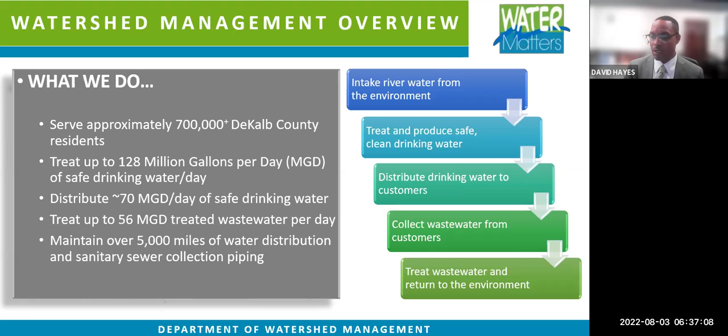Next slide, please. So why is the county replacing the water line? Some of the water lines are more than 60 years of age and have by far outlived their design service life. By replacing these lines, we will be reducing water main breaks and improving service, which will yield a better DeKalb for our future. And to accomplish this, next slide, please.

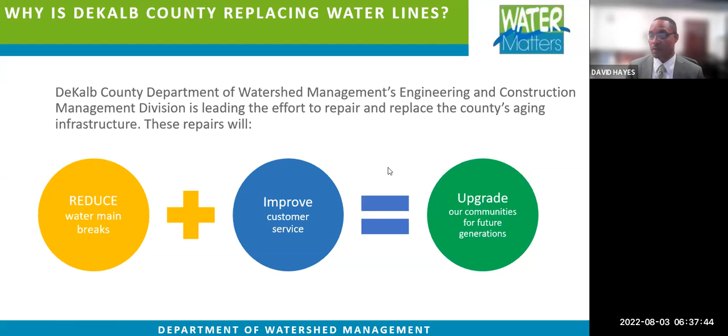To accomplish this, we have dedicated a full team for this project to include every needed resource from Watershed and all other DeKalb County departments, as well as several industry-leading engineering firms and construction firms who will be led by Watershed's engineering department. This will allow a timely, safe, and successful project.

Managing this initiative, and the next person you will hear from is our program manager, Ms. Cassandra Marshall. Thank you, Director Hayes. Good evening. My name is Cassandra Marshall. I'm the Program Administrator for Watershed Management. I am responsible for managing the construction projects and the DWM construction management staff.

In these next few slides, I will provide an overview of the system problems and our solution to repairing the aging water system. Next slide.

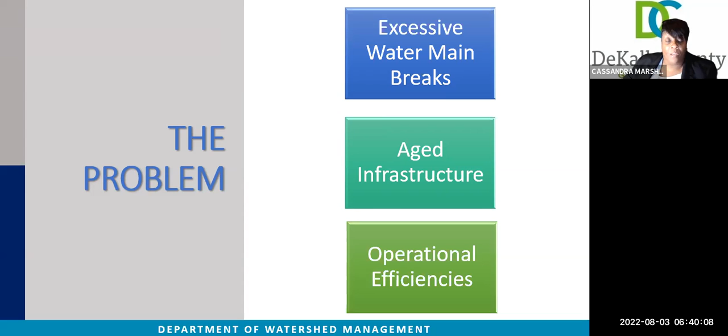To develop the model, we use the county GIS data, meter data of water usage from the billing system, and system facility data such as water storage facilities and regulating stations. This data was ultimately used to develop the county master plan and used to prioritize projects. Next slide.

So to this point of the presentation, you've heard about the problem and the development of a replacement plan. I will now speak about the solution and the execution of the CIP project. So what does CIP stand for?

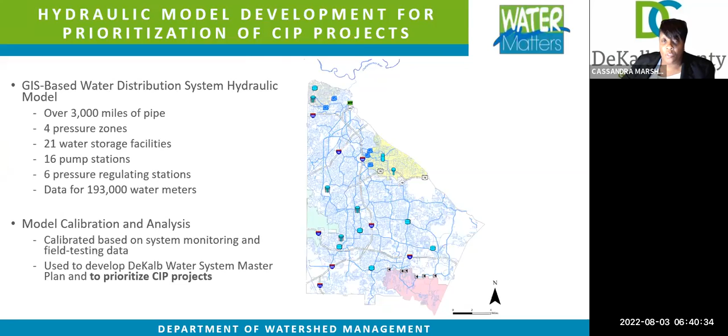CIP, or a capital improvement project, is a project that helps maintain or improve an asset. It can either be new construction, an expansion, renovation, or replacement of an existing infrastructure. Last year, the Board of Commissioners approved a new CIP program for $2.4 billion for projects to be completed from 2021 to 2030. The McClave water main project is a $6.1 million project included within that plan.

My team, the CIP team, is responsible for getting that work done. My team includes 4 DWM construction managers and 12 licensed inspectors. Later in the presentation, you will also hear from the DWM construction manager for this project, Mr. Edgardo Amezquita, who has over 20 plus years of construction experience and is a licensed water professional.

Along with in-house staff, we are also supported by consulting firms who help assist the county with construction management and inspection services. What we want you to know is we're here to help. We want to reduce or eliminate emergency repairs. We want to stop the breaks. We want to protect the environment. And finally, after this project is complete, it will improve sustainability to the system. These improvements should last a minimum of 70 plus years.

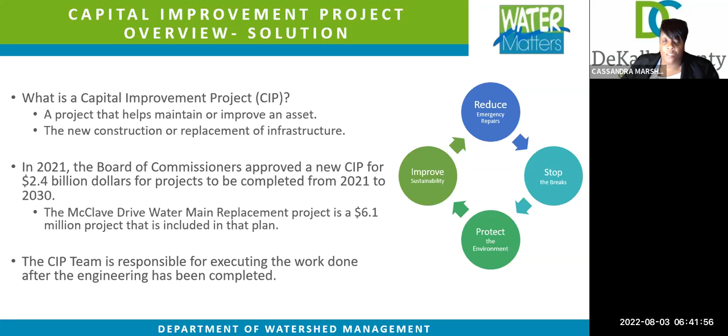You will now hear from Mr. Edgardo Amezquita about the project scope and overview. Good evening, everyone. My name is Edgardo Amezquita. I am the construction project manager assigned to this project.

And what my team does is we work closely with the contractor in order to facilitate and quickly and efficiently get this project done.

Our scope of work includes mobilization of equipment and materials. Some of the equipment you will see will be backhoes, dump trucks, metal plates on the street. Some of the materials you'll see delivered throughout the project include concrete, gravel, and towards the end of the project, asphalt being delivered and installed.

We also established traffic control. The traffic control will be with sign postings, and you'll also see traffic directing personnel. Please adhere to that direction while they're out there, because they're out there for your safety as well as the construction workers'.

We also install the new water main, and then we establish new water services. The water services come in two phases. The first phase comes early on in the project, where we install the actual copper piping used for the service. Phase two is when we actually connect that copper pipe to the households, which doesn't happen until the end of the project.

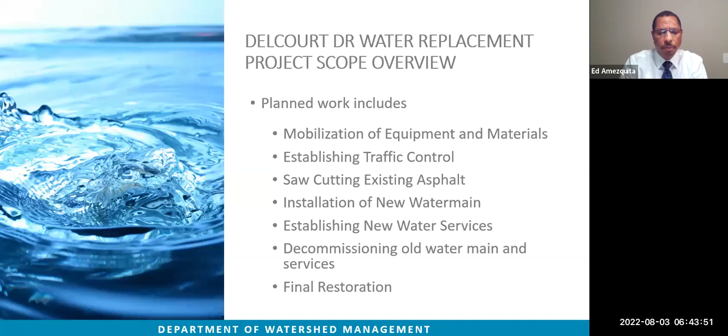The roads affected on this project will be McClave Drive, Raymond Drive, Havalyn Lane, Autumn Drive, Addison Drive, Wheeler Drive, Brook Park Way, and Fair Lane. A second notification will go out by way of posting, so you'll know when construction is coming to your actual street. The first notification covered the overall project, but the second notification is when the contractor is actually going to be on your street, with postings to let you know when that's going to happen.

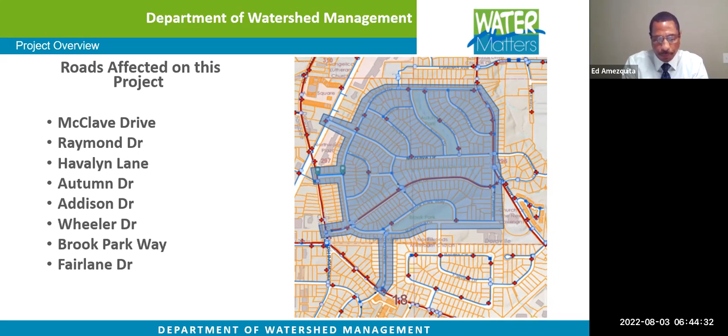Now, the method of this project will be open cut, consisting of cutting the asphalt, digging the trench, and installing the new water line. Then, after the testing and all things go well, backfilling the trench and replacing the asphalt.

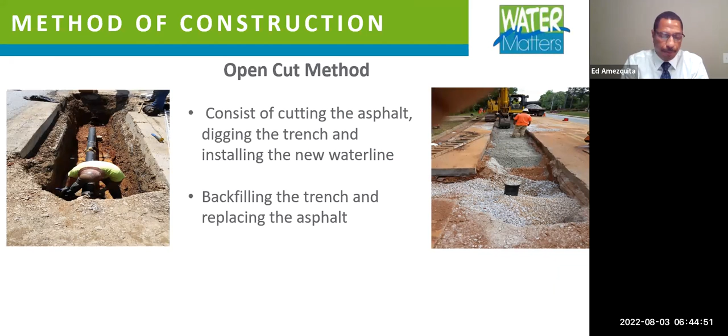Now, these are some of the notices that went out. Construction will start August 3rd, which is tomorrow. You should probably have seen some piping being delivered on site already, but that is just the beginning of the project. We will be going full blown probably next week, so get ready, because it's coming.

Then we'll go into final restorations around August 19, 2023, which will include punch list and testing to make sure everything is in order. After that, we go into finalizing the project, and we'll try to end it around September 9th, 2023. But that date is tentative — it'll probably come a lot sooner than that, but we like to give ourselves enough time.

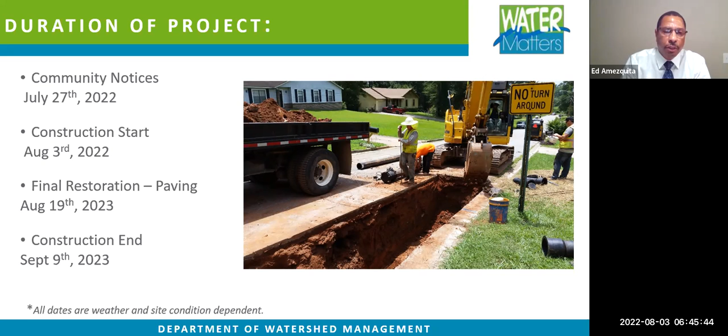What my team is responsible for is ensuring erosion and sedimentation controls are in place, and proper installation of the new water line. We communicate with residents, provide notifications in case anything happens in the field, and you will always see an inspector there. Always try to find the inspector, that way information comes straight through our team, since construction workers may not know who to direct you to.

Always look for the superintendent and the inspector, which is what I prefer, the DWM inspector. We ensure traffic control is maintained daily, and we try to organize deliveries to be less disruptive to residents, though that depends on how the deliveries get done. Most importantly, we ensure safety measures are followed daily. If something goes awry, we will shut down the project. Safety is of the utmost priority.

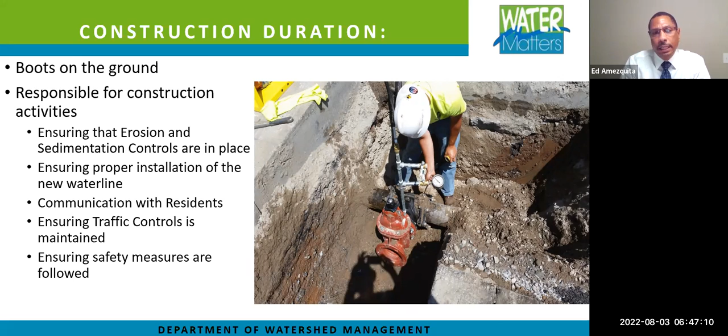On the left is a typical picture of what you will see and expect during construction. On the right is what we hope the project will look like when done, paving nice and clean, and we'll be out of there with no issues.

So now I would like to turn it back over to Cassandra Marshall.

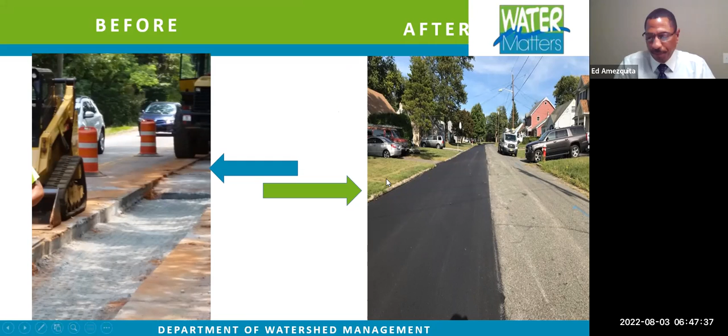At this time I will address community concerns and what the community should be aware of. What to expect: construction brings inconveniences which we want to minimize. You'll see a lot of construction traffic, foot and vehicle, large dump trucks, and heavy equipment. There will be many construction workers, county employees, and contracted workers throughout your community, along with material and equipment deliveries by large tractor trailers. Crews and flaggers will guide these large vehicles in and out of the community.

Working in the area also brings parking issues, with vehicles parked alongside the streets and work zones. Work zones will be delineated by orange cones or barrels. As a security measure, all county contractors and employees will have identification badges and marked vehicles. There will be increased noise from equipment backup alarms, heavy equipment usage, and saw cutting of asphalt.

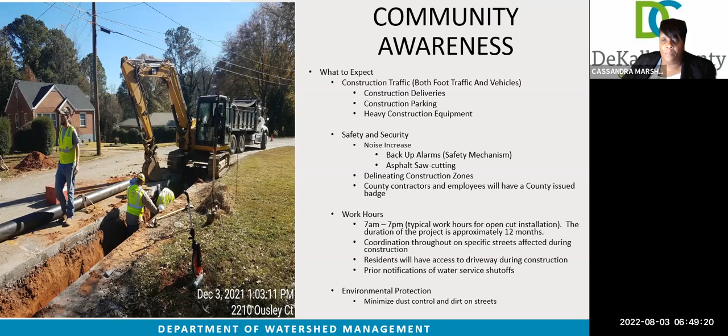Our typical work hours are normally 7 a.m. to 7 p.m., Monday through Friday, and sometimes weekends. However, when working in residential areas, we work from 8 to 5. Residents will always have access to their driveway during construction, and notifications will be distributed prior to any water disruption. One last item you may see is silt or dirt on the street; the contractor will be responsible for keeping the streets clean and swept daily.